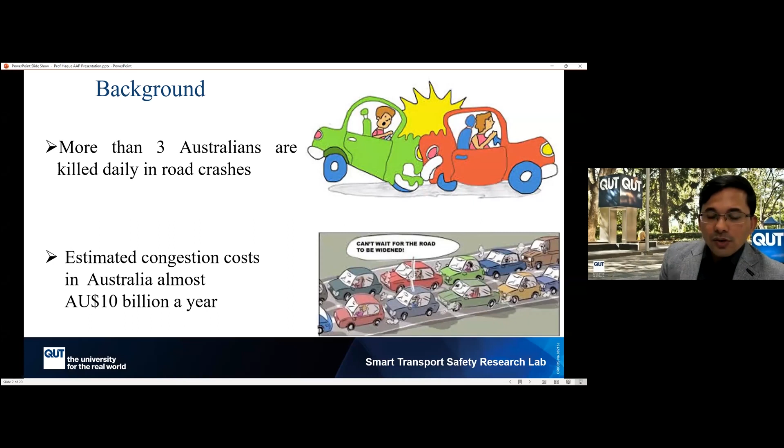So let's start with the background first: why we are all fussing about connected and automated vehicles, because of the transport externalities that we have. In Australia, more than 3 Australians are killed daily in road crashes. And over a year, we have around 40,000 hospitalized injuries. Another important externality is the estimated congestion cost. In Australia, it's about $10 billion a year. So technological innovations like connected and automated vehicles are bringing the promise that they would be able to solve these problems.

And some experts believe that they will solve the problems overnight, but I'm on the other side, the pessimistic group. We believe that it will take time, as has also been presented, it is so important to understand the interactions between automated vehicles and traditional vehicles in traffic, because we cannot change all the vehicles overnight. There will be a considerable period where we'll have mixed traffic.

Okay, now there are two concepts here. One is connected vehicles, another one is automated vehicles. What are connected vehicles? Connected vehicles represent the capability of vehicles to fetch information from neighboring vehicles as well as from the infrastructure and offer that information to the driver, so drivers can make informed decisions about various traffic or driving events. On the other side are automated vehicles. Automated vehicles represent how much of your driving task you can assign to the machine.

And as Professor Huang Helai mentioned in his presentation early this morning, automated vehicles have various levels, and we are receiving publications in AAP trying to understand the safety impacts of automated vehicles of various levels. Now, if you think about connected and automated vehicles, I strongly believe that at some point they will come together and become connected and automated vehicles. If we look at the industry or the vehicle manufacturers, we can see those capabilities being developed gradually over time. But we have a long journey ahead. So the scope of this study today is limited to connected vehicles.

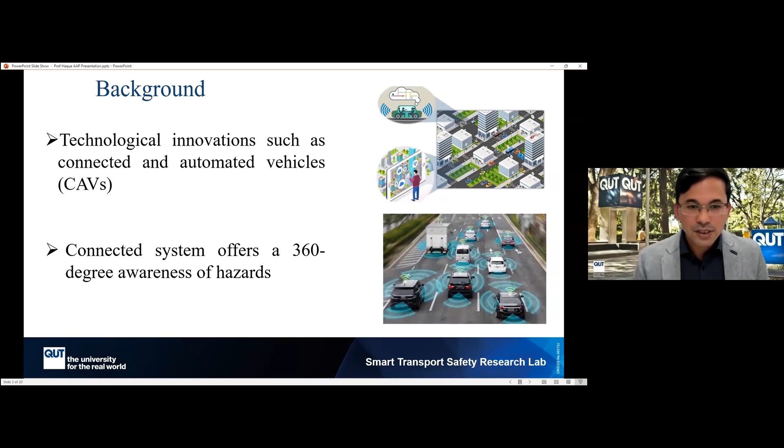So what is the motivation for the current research? As I said, Professor Huang really presented a rigorous investigation of the road safety research that is happening. But here I'm mainly talking about research being done in the area of connected and automated vehicles. Connected automated vehicles are quite new, and we all know that they are coming, but researchers do not have access to the sufficient data required to answer lots of scientific research questions. Okay, what has happened in the past? We have seen numerous papers using numerical simulations, published in various transportation journals, by Elsevier and other publishers.

But the main problem of the numerical simulations is that they don't consider the human factors, actually how humans are interacting with whatever technologies we are offering to them. First thing, and for the research, when it comes to the driving simulator, I'll be talking about the capability of the driving simulator more in a minute.

And when we see the lots of research being done, of course, the driving simulators have been established to understand mainly psychological research and human factor research. And it has been tested for various driving tasks. We give some task-driven goal, and we see that... we think that if we would like to understand how drivers behave in that environment, we need to offer an environment rather than a particular task.

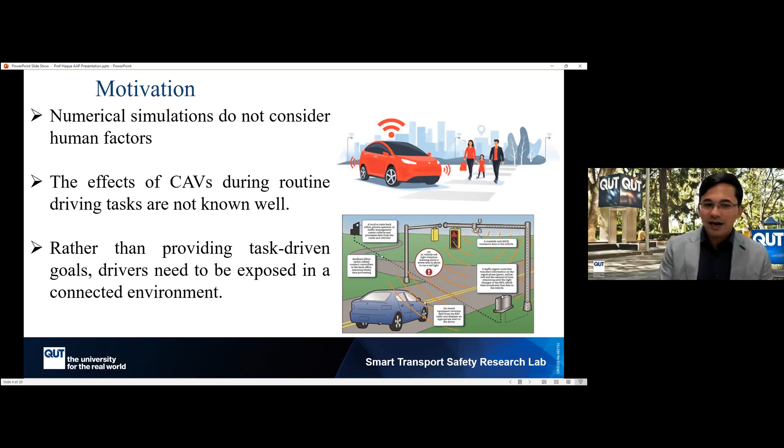So that's another main motivation for us, that we want to expose drivers to a connected environment. I wish we could do it in the real world, but of course the ethics will not allow it, and it's costly. So we are going with the driving simulator. And again, I'll be talking more about that.

So to clarify what we are trying to do in this article, we are trying to examine the effects of the connected environment on driving behavior and safety. At first in this article, we try to answer two broad questions before we go into details. So whether drivers can improve their driving behavior towards safety through a connected environment, that's the first thing.

And the second question was what will happen if there is any communication delay or communication loss in the connected environment. Because if you are connected with the IEEE kind of journals and those people who are developing these connected vehicle technologies, there has already been discussion that there might be a situation where you can lose the communication with the vehicle, or all the messages or instructions you are giving to the drivers might be delayed. So we would also like to see what will happen if it happens in the real world.

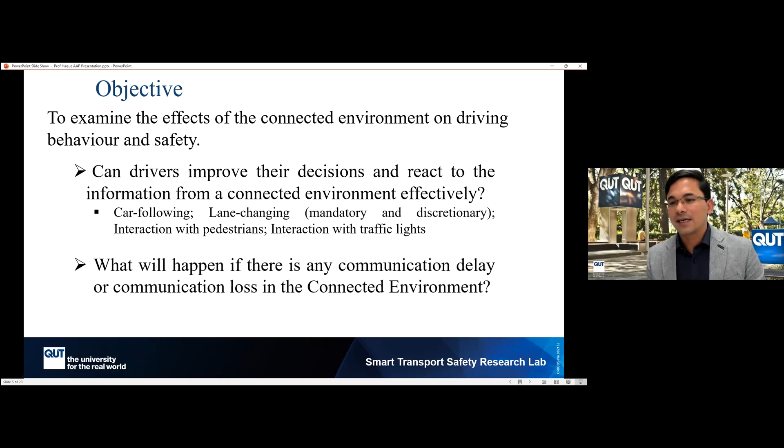So for this experiment, as I mentioned, we have used our advanced driving simulator. This is QUT's CARRS-Q advanced driving simulator. If you are not familiar, CARRS-Q is the Centre for Accident Research and Road Safety, Queensland. It is one of the top road safety organizations in the world, and has contributed many papers in AAP and other road safety journals. So I'm fortunate to be affiliated with CARRS-Q for sure.

And this simulator has the capability of 6 degrees of freedom. For those who are working in the area of driving simulators, it can actually produce the driving environment as close to reality, if not fully. It can move and twist in three directions, X, Y, Z, and that's why it is responsive to pavement irregularities, for example. So it really gives a good realism of driving, and it is covered with a 180-degree field of view with 3 big projectors.

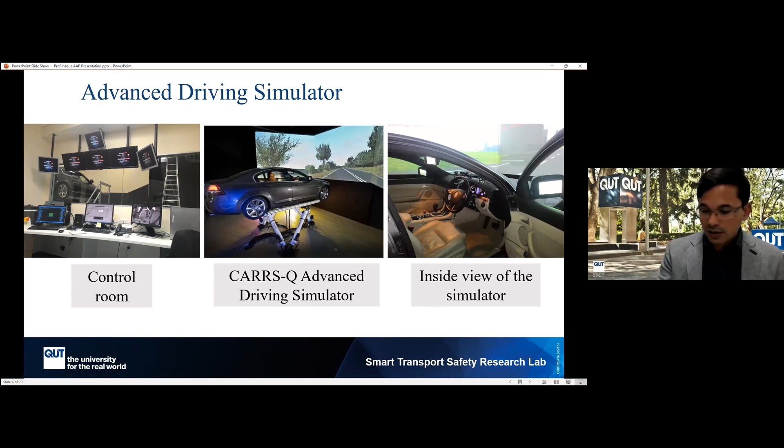And here I have put some snapshots of the different control systems and shots of our driving simulator, which has been tremendously helpful in doing much research in the area of road safety. And this is the first time we have used this driving simulator to do research from the transportation engineering point of view, because much research in the driving simulator has happened from the psychological point of view. And we have actually demonstrated that the driving simulator can be used for many transportation engineering research, and the models we developed from the driving simulator data can replicate the real world field data. Of course, that is off topic today, but we can talk more later on.

So in this driving simulator experiment, we have simulated 4 driving conditions. One is, of course, traditional driving, normal driving, when we did not provide any kind of connected communication or any kind of assistance to the driver. The second one is perfect communication, meaning the communication was working perfectly, and we provided the assistance or driving aids to the driver in time. And we have the other 2 scenarios, which is communication delay. In this case, whatever assistance we provided to the driver was delayed by 1.5 seconds. And why 1.5 seconds?

Actually, we have tested various delay scenarios and found that 1.5 seconds is the point after which we see some changes in the driving behavior start to happen. And communication loss: in this scenario, the communications are lost from time to time.

So as I mentioned in the beginning of my presentation, we wanted to give drivers an environment rather than any kind of car following or any kind of task. So we just thought, okay, what does a typical driving episode look like? Let's say a typical Australian driving from home to work: what are the typical roads? They might be traveling a little bit on motorways, and they need to travel in suburban or urban conditions.

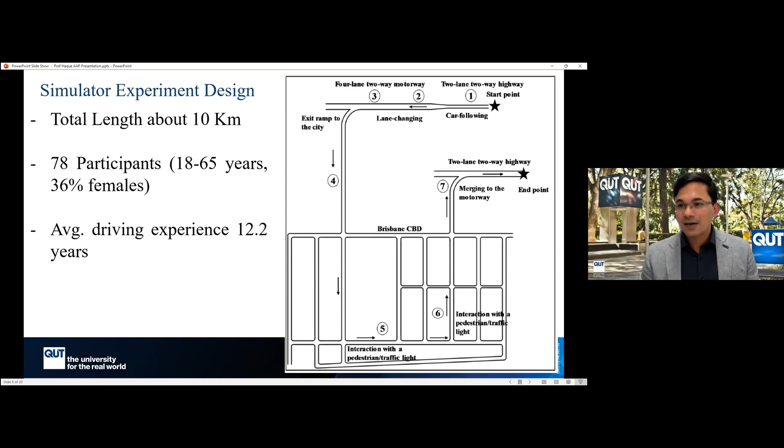And we had 78 participants altogether, with an age range of 18 to 65 years, and that age distribution closely resembles the age distribution of the Queensland population. Around 36% were female, and their average driving experience was 12.2 years. So you understand that they are quite an experienced group of drivers.

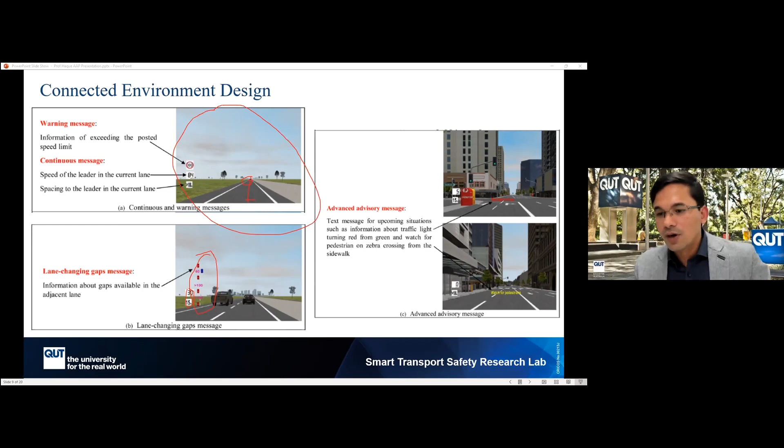We did the same thing for the pedestrian crossings. There are multiple pedestrian crossings in the scenario, and some of them have pedestrians. We provided information if there was a pedestrian on the crossing, much earlier, something like "watch for pedestrians". I remember we gave that information around 6 seconds before the pedestrian crossing.

How should I clear it? Okay.

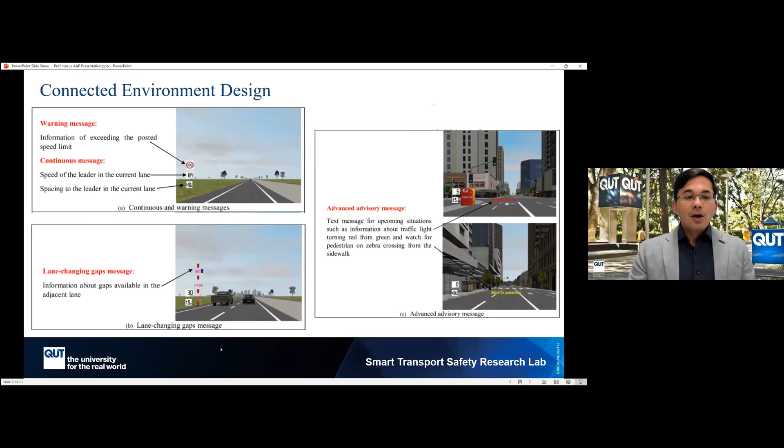So now I will start talking about our different driving simulator events and some of the preliminary results that we have got in this paper, and that's the main topic. But of course, we have done detailed investigation for each of these traffic interactions through other scientific research articles, which I have not covered here. There are a couple of important points that I did not cover, but I would like to mention them before I go to describing the results.

First of all, for any driving simulator experiment, of course, we have followed the standard protocol, and we have randomized the driving events. We have randomized the appearance of the driving routes or driving conditions. These are the absolute minimum, and to save time I didn't go there. One particular aspect of this whole experiment design is that we have given attention to detail. Each of the traffic events and the driving road have been constructed following the Australian road design standards, and the Brisbane CBD is the actual Brisbane CBD. All the traffic events were created after lots of trial and error to make sure that they resemble actual traffic events.

So here I'll be talking now about driver performance and compare between the connected environment and the baseline conditions, and in some cases perfect communication and communication loss. But please note that we could not have the communication delay and communication loss for the city areas because of the quickness of the event, but we simulated them for the traffic events along the highways.

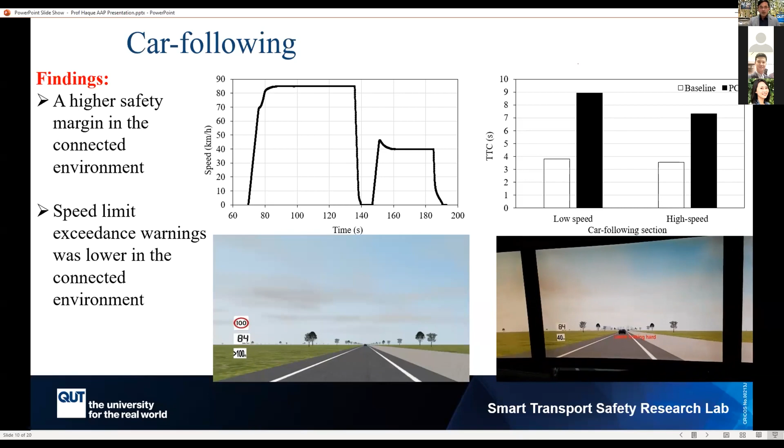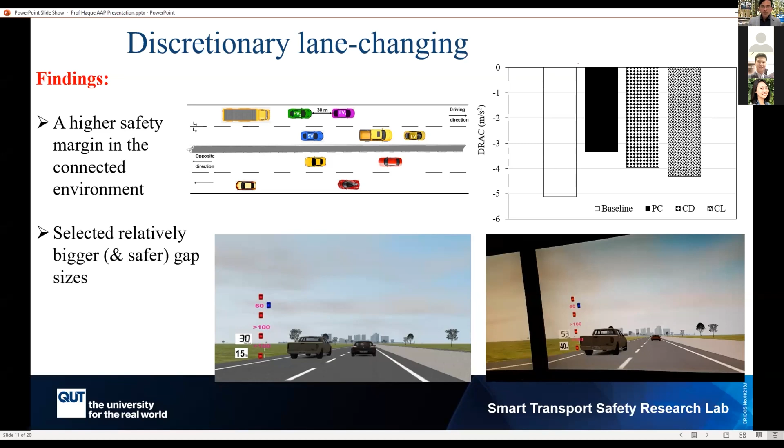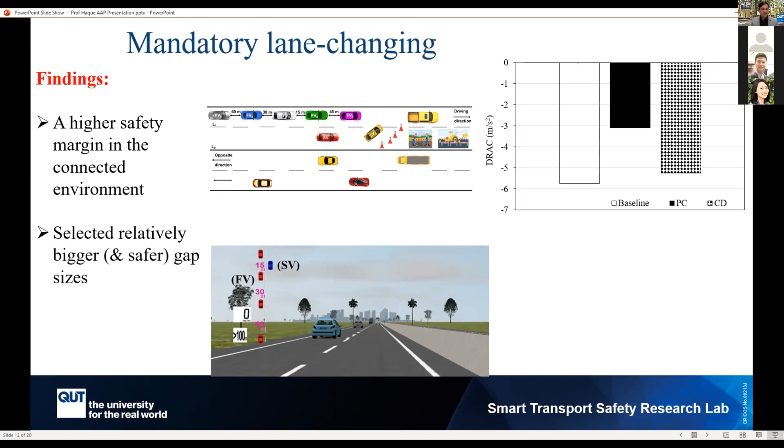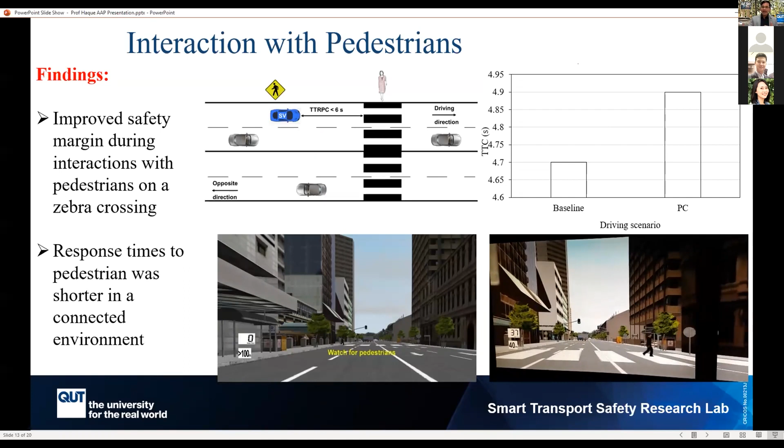Interaction with the pedestrians along a pedestrian crossing. You can see on the video, on the bottom left corner of my slide, that we provided the information to the driver when the drivers were around 6 seconds away, and the pedestrians were not visible at all by the naked eye. And when we provided the information, we found that they responded to the pedestrian very well. They maintain a higher time to collision with the pedestrian, which is an indicator of improved safety.

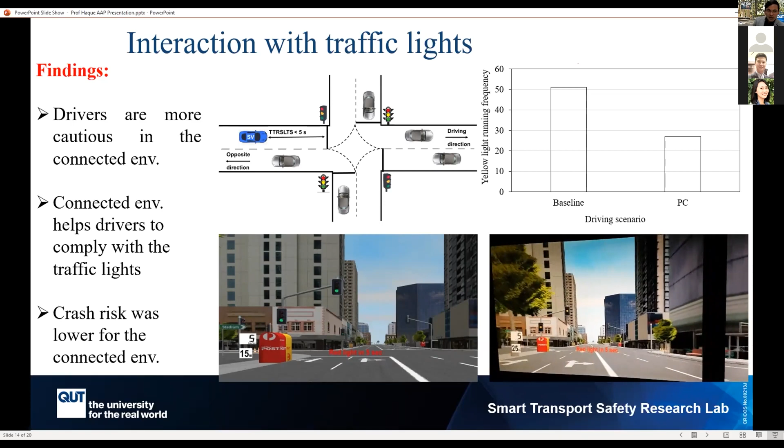So in conclusion, for the whole experiment design, we found that in the connected environment, they maintain a higher safety margin during the car following, and in the perfect communication, they violate the speed limits less often. Apart from the lane changing with a higher safety margin, they are more prepared to give way to the pedestrians, and they run yellow lights less. But when we have the communication loss and communication delay, it deteriorates safety as expected.

So you can see that the connected environment, with information being given to the driver, brings lots of promise, because at the beginning of the experiment, we had been questioning ourselves whether this information would increase their workload or deteriorate their driving performance, or whether they would take it positively and improve their driving performance. It looks like they have actually improved their driving performance based on the information provided. But these are our preliminary results from that comprehensive driving simulator experiment.

As I mentioned earlier in my presentation, with this whole experiment design with lots of traffic events, my team here at QUT has been working on developing various traffic flow models and various traffic safety models, and we found that overall it's going positive towards safety; that is one thing. Second, we have quite clearly established that the driving simulator is a powerful tool not only for psychological research, but also for lots of traffic engineering research.

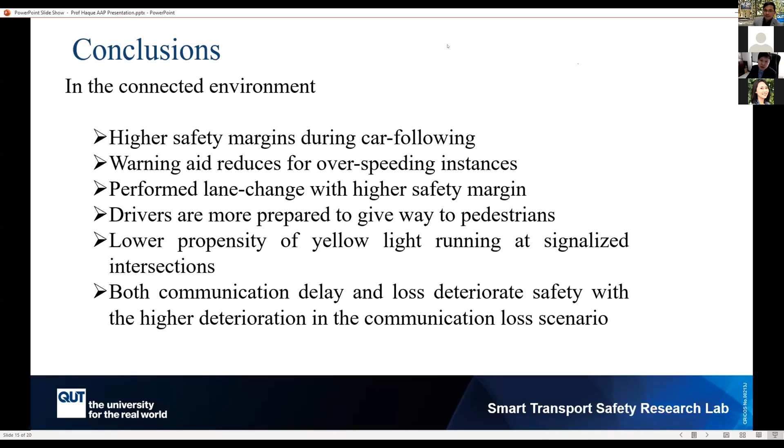I got several questions, but I chose two. The first question is a fundamental question about the driving simulator itself. How do you ensure that driving simulation experiments maintain the same driving behavior as in the real world, especially since CAVs do not exist right now? Thank you, Professor Lee, that's an excellent question, and that was the main message that I wanted to convey.

We all believe that when we go to the driving simulator, our driving is not like real-world driving. So it is not a good idea to compare the driving parameters of the driving simulator and the real world. But note that here we are talking about the differential effect, meaning between the normal driving condition and perfect communication, both in the driving simulator scenario. That differential effect is important to understand from the driving simulator. Of course, it may be slightly different from the real world, but as we are conducting some research, we say that that differential